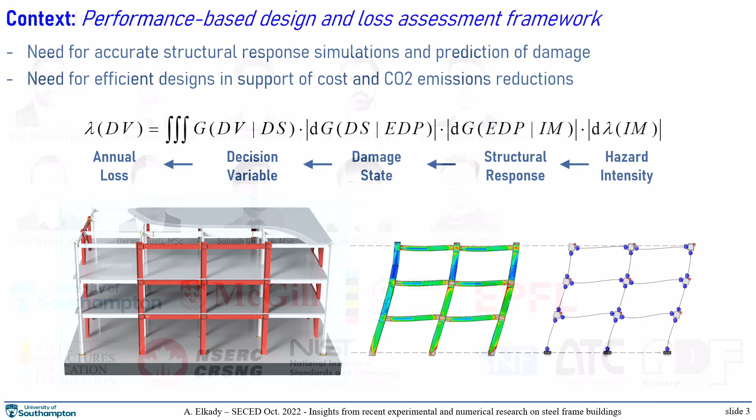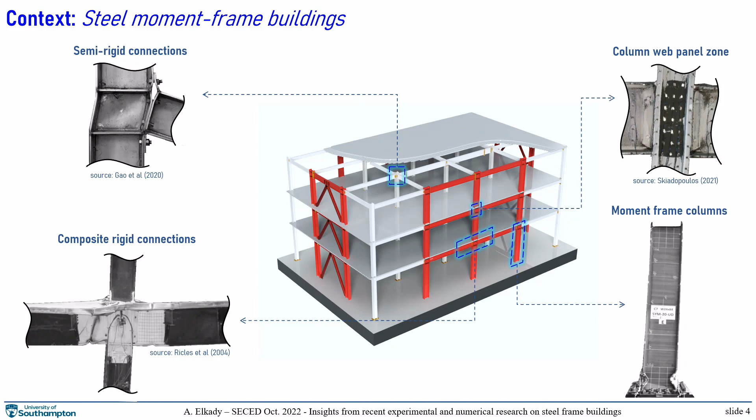Within this framework, we focused on buildings that have steel moment frames, which are common in construction. We are focusing on four structural components: the moment frame columns, the column web panel zone, the composite rigid connections, and finally the semi-rigid or gravity connections. I'm going to discuss what we have found or developed with respect to these four components.

I will start with perhaps the most important element, which is the steel frame columns. This is all discussed within the context of earthquake engineering.

If we look at steel moment frames, these are designed to dissipate earthquake energy through plastification of the beam ends. But you still get plastic hinge formation at the base of the first story column, where you have a fixed base. Under strong seismic events, you can get an additional plastic hinge at a higher story, and then you develop what we call a collapse mechanism, which of course we try to avoid in design.

Now the question here—the one you see on screen is an example from a shake table utilizing hollow square sections. But the question we had was: how would I-shaped or W-shaped columns, which we use in North America and Europe, behave under this type of seismic loading?

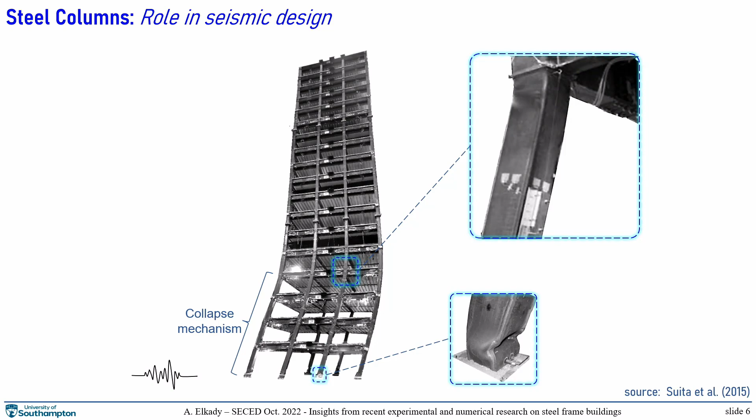About 7 years ago, what we had in the literature were tests conducted mainly on shallow or stocky columns—those less than 40 centimeters in depth. Looking at the plastic rotation capacity or ductility of these columns, several under moderate to high axial loads develop very limited plastic rotation, around 1%, which can be critical in a seismic event. We need more than that.

So the question was: how would deeper columns, those deeper than 60 centimeters, behave under the same type of loads? We conducted experimental research, testing about 24 specimens in 2 different labs in Canada, in Montreal. These are the setups you see here, with the specimens highlighted in blue.

On the one on the left, we tested cantilever columns, with a fixed base and a pin at the location of the inflection point. These are 2-meter long columns, tested at a 2/3 scale, so around 40 centimeters deep.

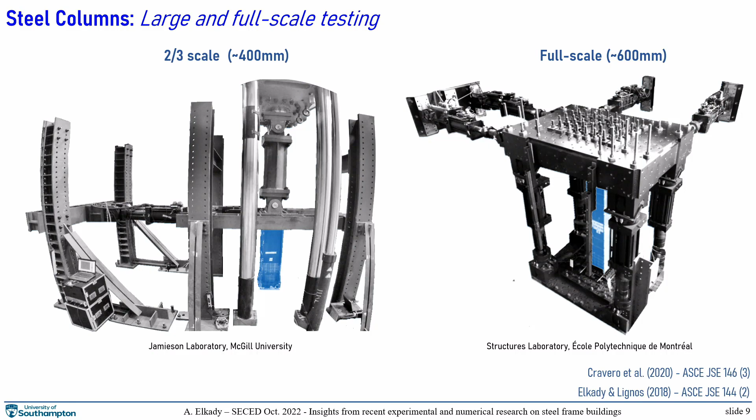The one on the right, we were able to test full-scale columns with realistic boundary conditions. This is a very fancy 6 degrees of freedom setup at École Polytechnique de Montréal. We're able to control the boundary conditions at the column top, and we apply drifts in all directions, as I'll show you in a second.

Here are some videos to break up the text I'm showing you today. These are the two test programs—let's look at the one on the left, the 2-meter columns.

You can see it's being subjected to lateral cyclic drifts, while we simultaneously apply varying axial load that goes into compression on one side and tension on the other, typical of what exterior columns would experience under a seismic event. As you notice, the main failure mode is local buckling taking place at the base, as expected.

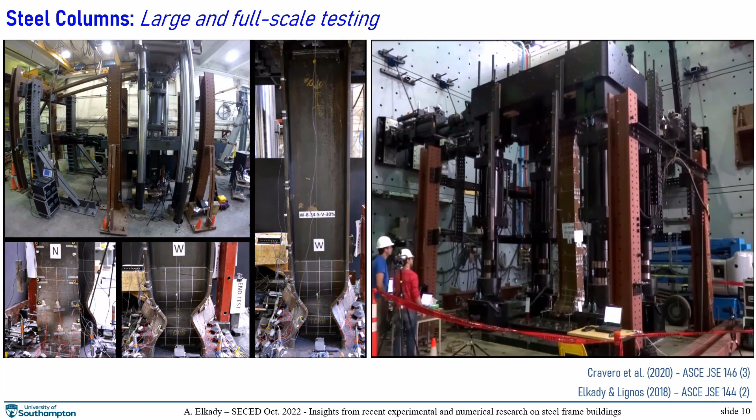Now the one on the right, with the full-scale test—it's a little dark, but you can see at the top we're able to simulate flexibility representative of the top joint, and we apply bidirectional drifts at the top, again representative of true earthquakes, with axial load applied on the column at the same time. You can see local buckling occurring at the base again, with some twisting and out-of-plane instabilities occurring at the later stage.

So when it comes to damage progression and failure mode, this is what we found out. Local buckling is the main damage mode, but this can become excessive after large rotations, and associated with that there will be some axial shortening. This axial shortening can be critical if you are considering that this column could be part of a high-rise building, for instance, so this can have effects on the overall behavior of the structure.

At the same time, if you are looking at larger rotations, like more than 2%, you can observe that once you get a plastic hinge at the base, the column in the weak axis starts to kick out a little bit, and you start getting some twisting modes. Now these two damage modes that you see, we don't design for those explicitly when we do seismic design, so this is something to consider.

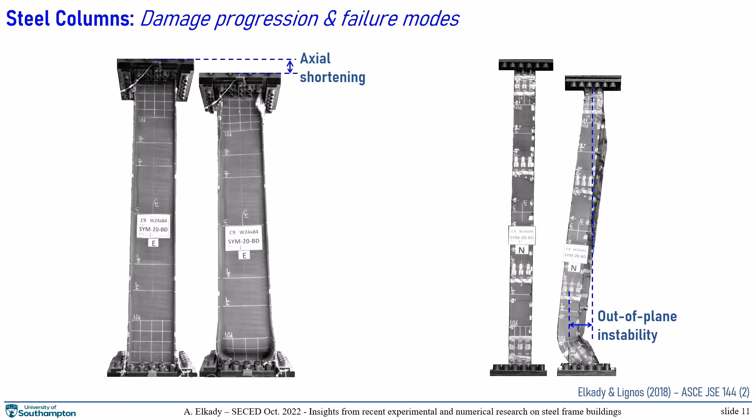Using this fancy setup, we were able to quantify the effect of boundary conditions. Before that, most of the tests were conducted on cantilever columns or columns with two fixed end boundaries. Now with these, what will happen is you get simultaneous plastic hinging at the two ends, and you don't observe much out of plane deformation in this case.

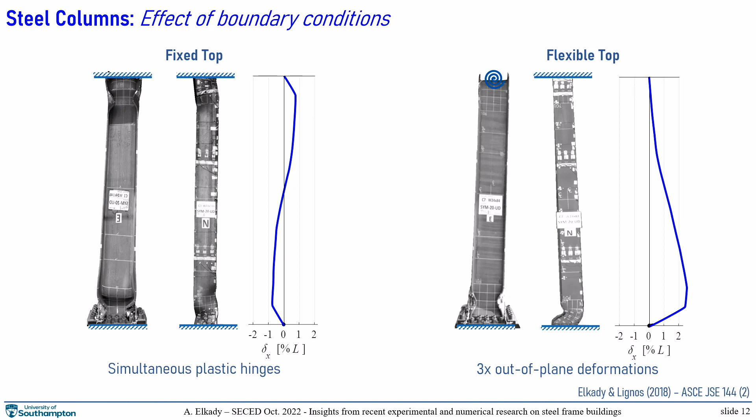Now if you look at the realistic case with a flexible top, what happens is that plastic hinging occurs only at the base, and at the same time the amount of out of plane deformation is about 3 times more, and this is again associated with some twisting.

When it comes to the effect of the loading protocol, this is something that has been known before, so we already know that any structural component's response will depend on the loading protocol or load history it's being subjected to. So here we were able to quantify that.

On the left, you see the column being tested with your typical symmetric cyclic protocol. This can be conservative compared to a strong seismic event, because under a strong seismic event, the structure will tend to behave asymmetrically - it will tend to move in one direction more, what we call ratcheting. So this is the one on the right.

What you can observe from here is that at the same target rotation, the symmetric protocol column can develop half the plastic deformation capacity and can shorten 5 times more. So it can be conservative for sure.

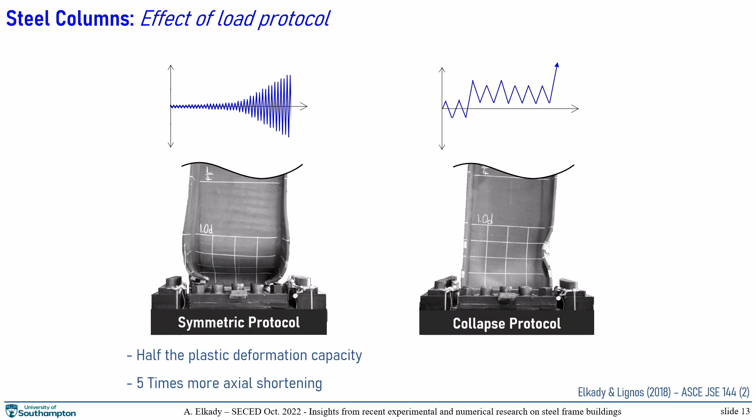As I mentioned, one of the important things we investigated that has not been done before is the effect of bidirectional loading. On the left, we have the unidirectional case, just pushing the column in the strong axis - these are the two protocols. We developed additional protocols that are consistent with those, but they have a weak axis component.

Under bidirectional loading, the difference is not substantial, but if you are looking at rotations more than 2%, you will start seeing additional P-delta effect in the weak direction. So this additional demand causes additional out of plane instabilities and twisting of the column.

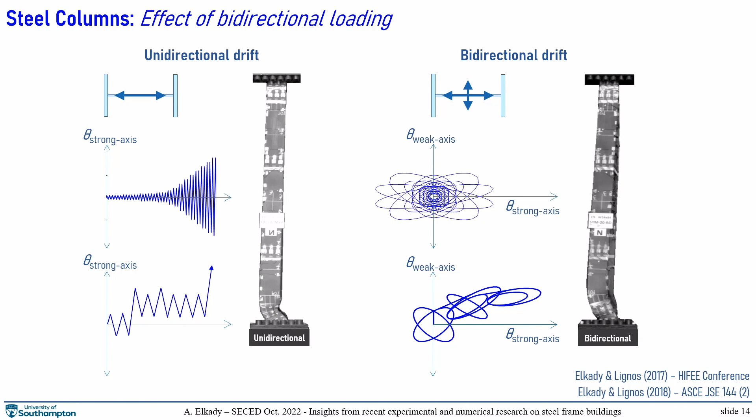Now this gives us a very good overview, an idea of how columns behave, but not the total picture. So we want to complement this with some simulations - we go directly to finite element analysis. So this is the numerical research part, and we had to build a finite element modeling approach from the ground up to make sure it's objectively robust.

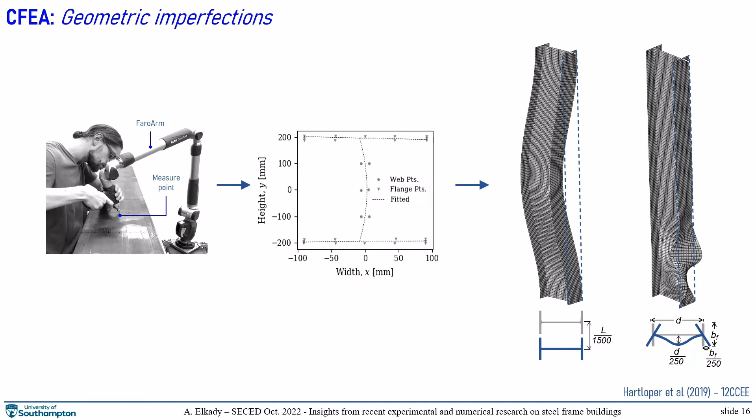We start by conducting measurement of the geometric imperfections in hot rolled sections, and then we recommended some limits that you can use in your finite element model. The same thing we have done with the residual stresses - we did the measurement, and then recommended some distributions that you can use again in your finite element model.

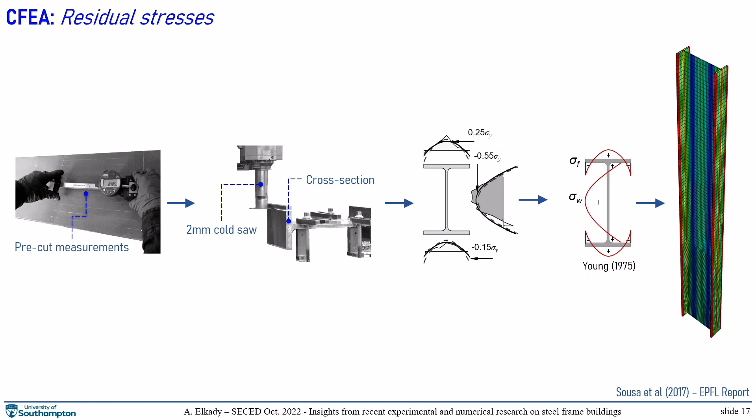Perhaps most importantly is the cyclic material model parameters. In order to obtain these parameters, we have done thorough calibrations with steel coupons subjected to different strain histories. Then by doing optimization for the material parameters, we were able to develop these parameters that you see in this table for different steel grades used in Europe, Japan, and the States. So you can directly look up your steel grade from this table, find the parameters, and use them directly in your finite element software.

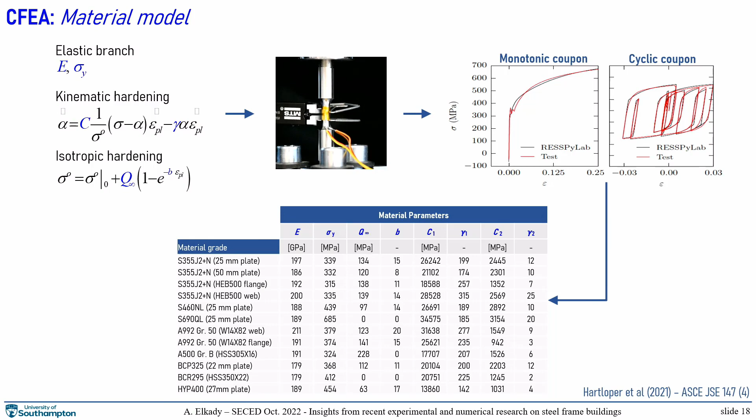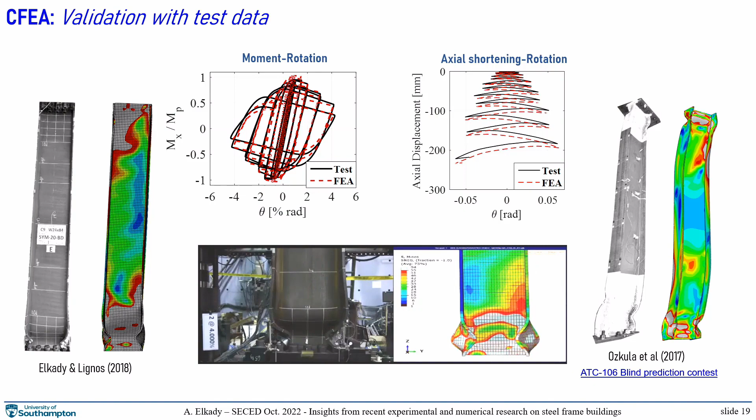And it goes without saying, we have done thorough validation of the model, pretty much with all the available test data from our tests and from others. And we contributed as well to a blind prediction contest, which we won. So this is all done to make sure that our model is objectively robust and that we can extrapolate it to other cases.

Now we have a data pool of almost 150 tests and more than 1,000 simulations. So we can use this to start developing better seismic design recommendations. And we can use them to do some regression and maybe provide some formulas for some important performance indicators.

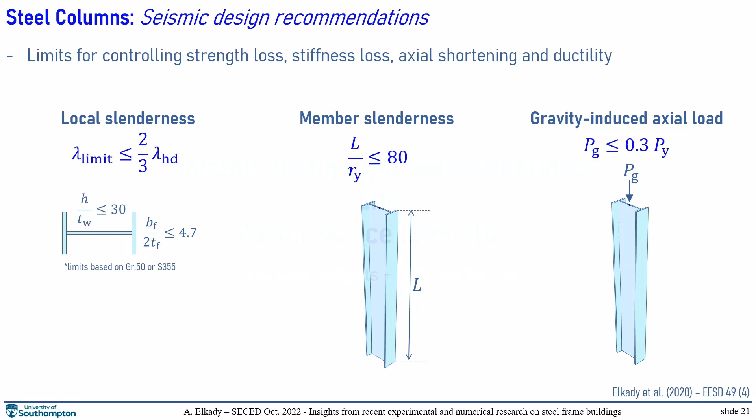So these are all limits, one related to the local slenderness, so making it more stringent. And then we have another one for the global member slenderness. And finally, a limit for the axial load ratio induced by the gravity load. So when you do those, then you will achieve a minimum performance of the column that is deemed acceptable.

I told you about performance indicators. So again, we have lots of data. Easily you can do regression analysis, and this is what we did here. So axial shortening, so now you can predict it with this simple regression formula. You just need to put the axial load, the column slenderness, and if you know the cumulative plastic deformation based on whatever history the column is subjected to...

...then you can compute the amount of axial shortening directly, which can be very useful if you are assessing damage in the aftermath of an earthquake and you want to see if this column will be repairable or not, for instance.

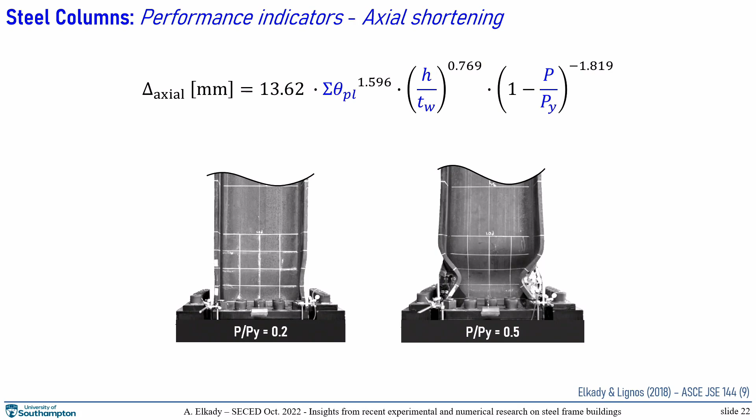Same thing we have done for the plastic hinge length. So this is another formula that you can use to compute the extent of the plastic zone. And this again can be very helpful if you are doing some kind of what we call distributed plasticity modeling or fiber-based modeling.

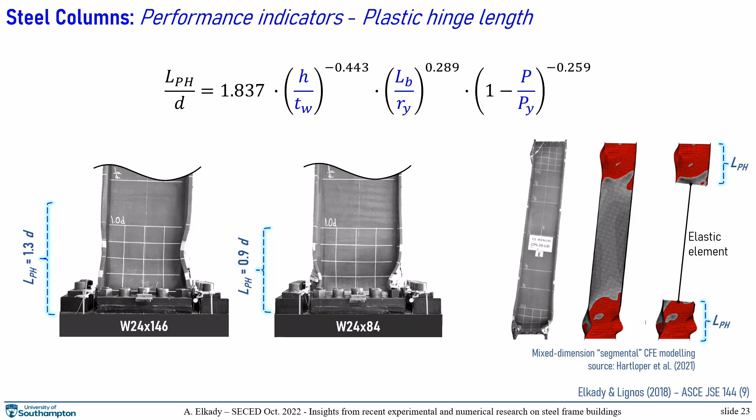So here, if you are using finite element, instead of modeling the entire column with solid or shell elements, no, you do that just in the plastic region where you are going to get the nonlinearity, and the rest of the member is represented with an elastic element. So it saves lots of computation time.

Now, this part for the loss assessment framework, we found that there was no fragility functions that can predict the probability of damage in columns. So we developed those as well. So we started developing, defining some damage states relating to the yielding of the column, local buckling, different levels of damage.

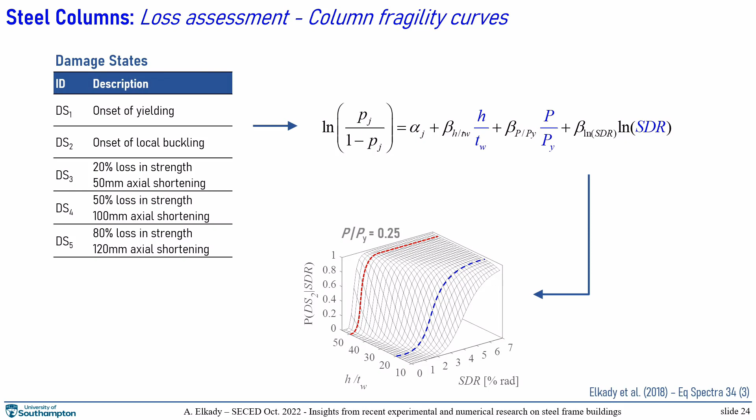And then again, in this equation, it's very simple. You just enter the story drift ratio, the axial load, the column slenderness, and then it will give you the probability of being in a given damage state.

Again, within the loss assessment, we found that currently, the current methodology to decide if you need to demolish a building in the aftermath of an earthquake, this was based on the amount of what we call the lateral residual drift. So if you look at a building, you do an analysis, or after an actual earthquake, you look at how much lateral residual drift is there...

...and then using some fragility function, you can get the probability of demolition. So we updated this with a bivariate one that considers both the lateral drift and the amount of axial shortening. And actually, the amount of axial shortening can be critical, and it can control this decision or this probability if you are looking at high-rise buildings subjected to long-duration earthquakes, for instance.

Now, I talked about models for engineering practice in order to do robust or accurate simulations. So in the literature, one of the important documents is ASCE 41. So these documents provide you with how to model different structure components.

So for columns, you represent the column with a single nonlinear spring, and this spring, you assign to it a backbone curve that represents the backbone of the moment rotation behavior under cyclic loading. The problem with this curve is that it doesn't consider the dimensions of the column, the axial load, and different things that affect the behavior substantially. So we wanted to update those.

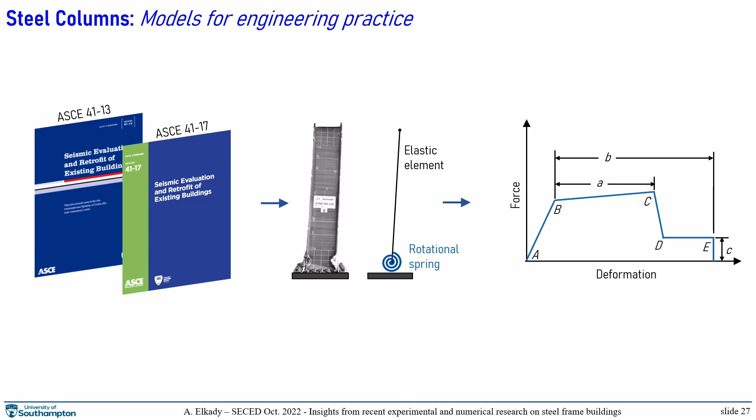While we are aware that different loading protocols will make the column behave differently, we developed two types of backbone curves: one representing the backbone under monotonic loading, shown in black, and another as the first cycle envelope under symmetric cyclic loading.

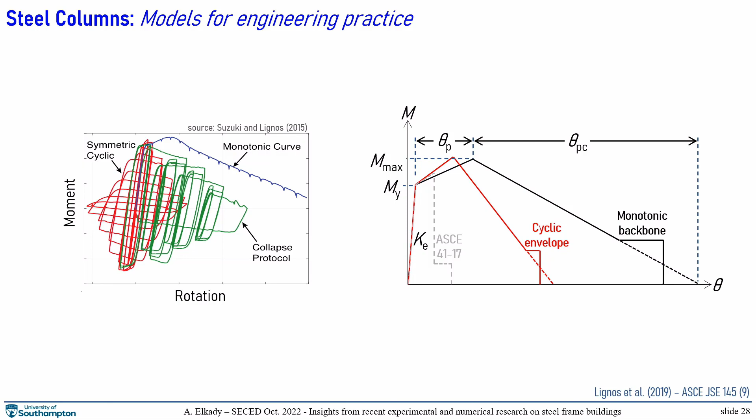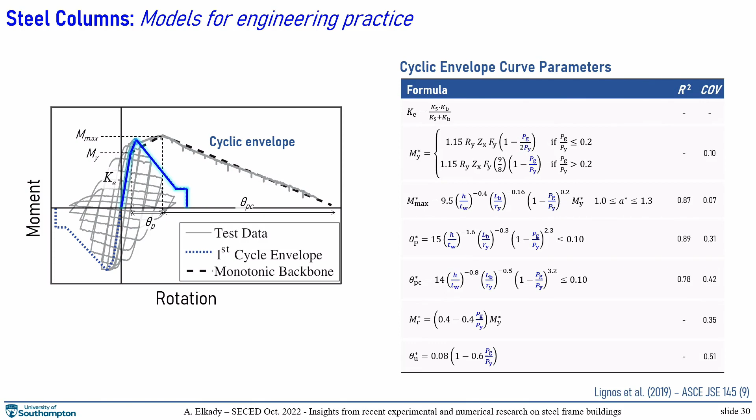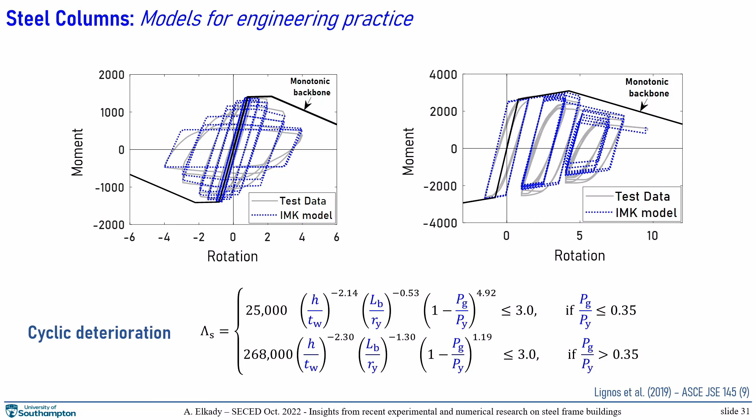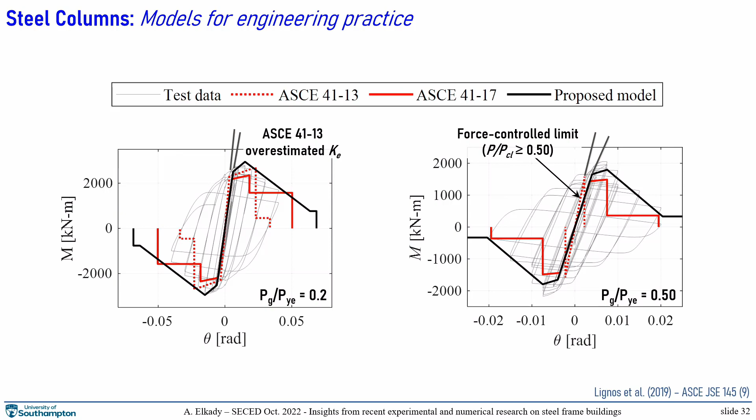This is a comparison showing how superior the new model is compared to the past version and the current version of ASCE 41. The new model is in black, and you can see it does a much better job capturing the elastic stiffness, the strength level, the post-yield stiffness, and the degradation slope. This model is already published, as shown in the reference here, and it's going to be included in the next iteration of ASCE 41, expected next year in 2023.

The problem is that if you let it go to high levels of inelasticity, like large shear distortion, you will increase the strain at the column flange, and eventually fracture can occur in the weld of the beam flange. There have been several detailing guidelines to reduce this probability of fracture or even eliminate it totally, which indirectly promotes the use of panel zones in seismic design.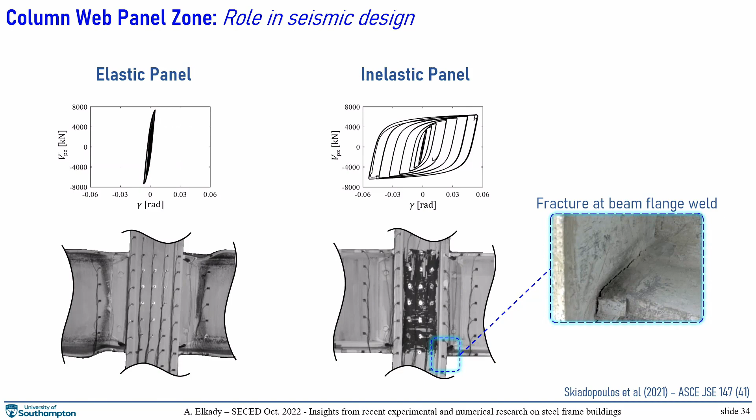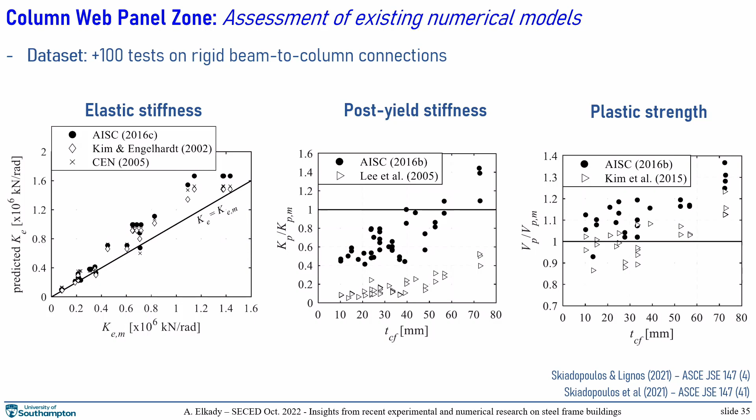How did we update it? Same procedure: we used the same finite element modeling approach discussed earlier, did a parametric study to complement the experimental data, and looked at different aspect ratios of panel zones, different sizes like thin and thick, and analyzed the stress and shear stress distributions and evolution in the panel zone.

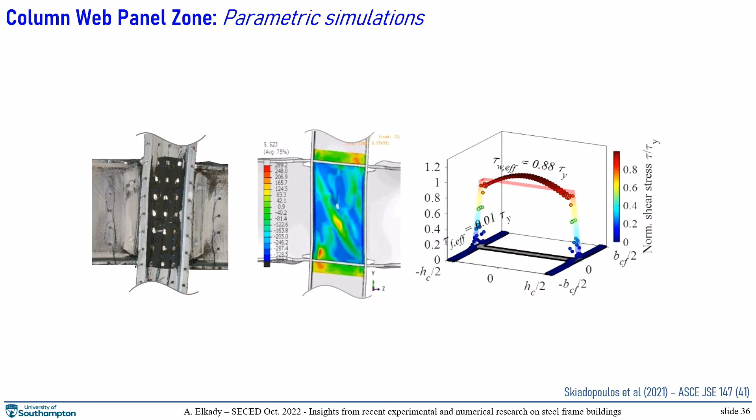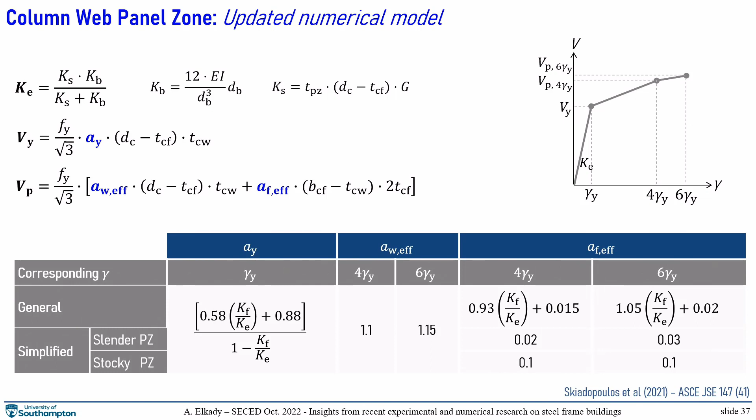From this, we developed this trilinear curve. Again, this is a hybrid model, mainly developed using analytical expressions with some factors obtained empirically just to keep it simple to use. You can construct the backbone curve, put it into your model, simulate—done.

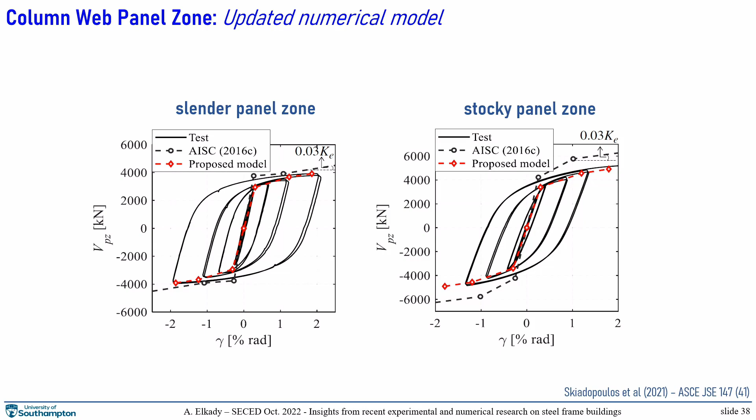So how good is it compared to the existing model? Here you can see some comparisons, with the new model in red. Again, even with the elastic stiffness, it does a better job capturing that, and the evolution of shear strength is much better, even at large levels of shear distortion.

Moving to the third topic, so we're almost close to the end. This part is actually from my PhD, where we looked at composite beams in rigid connections.

Now, how can we model these kind of elements? Well, there is one way you can do finite element modeling, but as you probably know, this is something that's not easy to do. It requires lots of computation time and lots of experience to do it correctly.

The other way is the component method: you represent each component within the joint, like the steel beam, the shear studs, the reinforcement, the slab, using simple springs, then connect those mechanically and you get your response. But this can be laborious if you try to develop it for each connection in your building. The simple, most popular one is where you just have one single spring to capture the entire behavior of the composite connection.

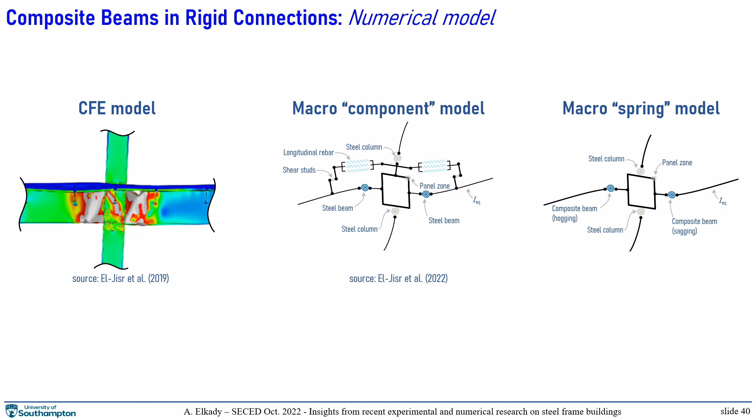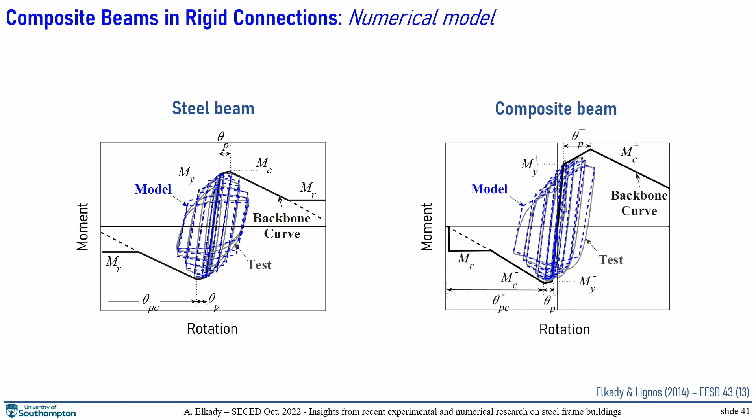Now, we already know how steel beams behave, and we have equations similar to the one I presented earlier that construct the backbone curve and simulate the cyclic behavior of steel beams. But once you have a composite slab, the behavior becomes asymmetric under hogging and sagging bending. So the question was, how much do we need to modify the backbone curve for the steel beam to obtain the composite backbone?

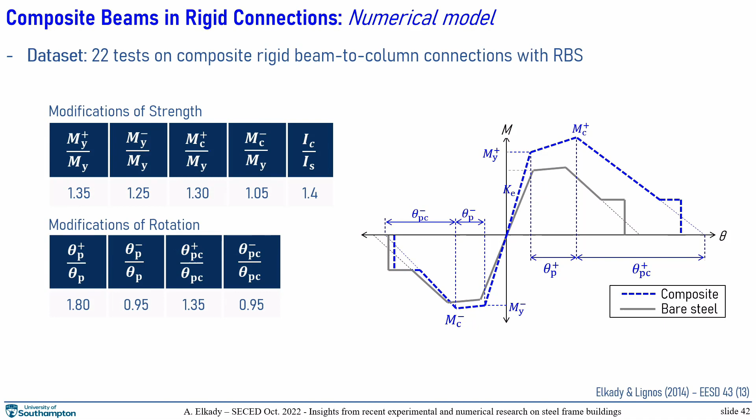We had 22 tests on composite beam-to-column connections with reduced beam sections. We did some calibrations and statistical analysis, and from this we provide simple modifications to strength and rotation that you can apply to get the asymmetric behavior.

Something else important recently investigated using finite element simulation is how differently this connection would behave when modeled as a sub-assembly, which is the typical test we do in labs. We just use a cruciform connection and test it like that. So how different will this be from the connection in an actual frame where there is continuity?

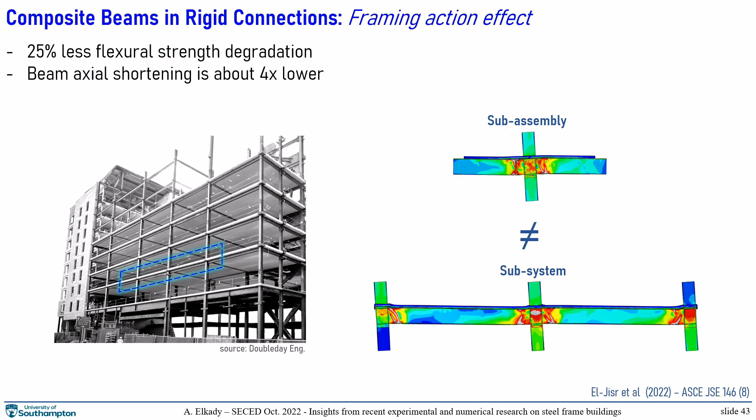What we found is that the connection can actually behave better: it experiences 25% less flexural strength degradation, and the beam axial shortening due to local buckling becomes 4 times lower than the one observed in sub-assemblies. The reason is the framing action and restraint from the columns next to the connection, plus the continuity of the slab and reinforcement.

So this is my last component, part of the research I'm currently conducting at University of Southampton. Semi-rigid connections are a main part of any structure. They are abundant in construction, found pretty much everywhere in conventional framing and in ductile framing in seismic regions. They come in different shapes and forms.

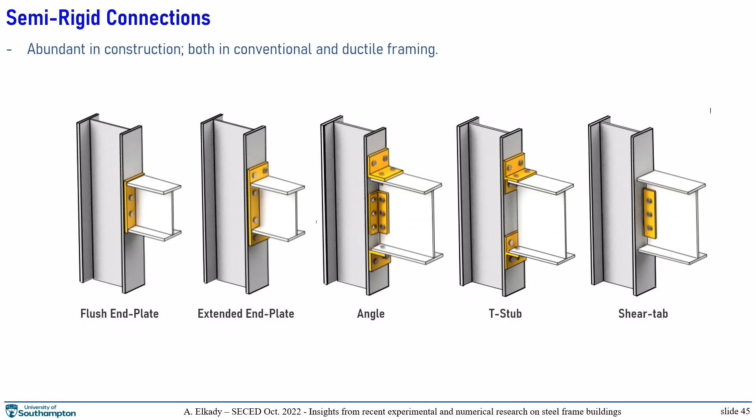The question is that when we design or model these connections, we typically ignore their contributions and just assume them as pinned or fixed as a simple way of doing things. You can see that end plate connections, like extended or flush end plates as shown in the illustration, can actually develop large stiffness and flexural strength, so it's a shame that we ignore this contribution.

Now, the literature as well as our recent research suggests that current numerical models for these connections fail to predict their response reliably. The good news is there's a huge number of tests conducted worldwide since the 1950s, which can help us develop newer models.

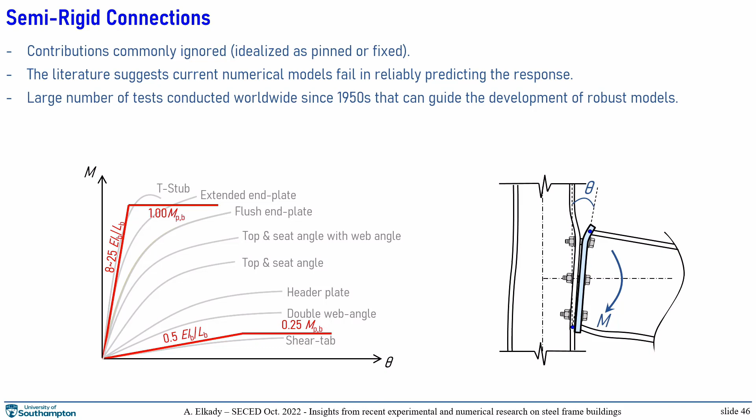So this is the task we've taken on, developing a comprehensive experimental database for the first time. Right now we have more than 1,600 specimens from more than 200 testing programs, dating back to the 1960s, and it's not easy to find some of these research programs. This is a multi-attribute database collecting information about the testing program, connection topology, geometry, materials, damage modes, and so on, all tabulated systematically.

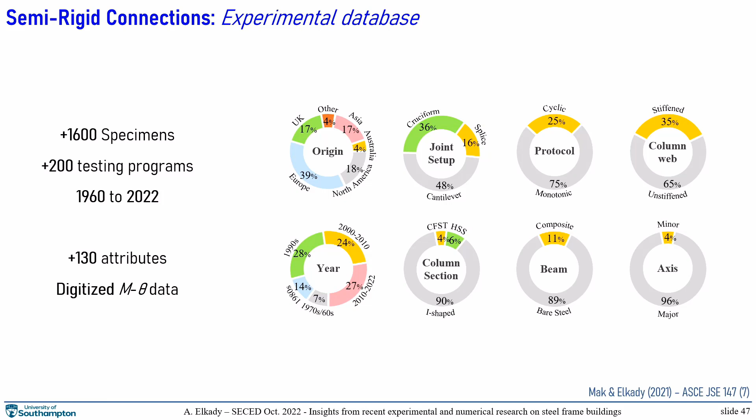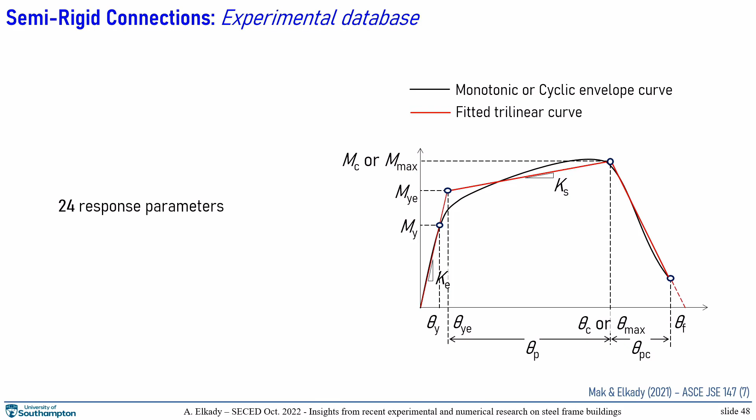And of course, we have the moment-rotation behavior for each specimen. From the moment-rotation curve, we can do some fitting to deduce parameters like stiffness, strength, ductility, rotations, and so on. Using this data, we can assess existing models or even develop newer ones. So this is just to give you an example here.

So this is for flush end plate connections, perhaps the most common one used among the different types of semi-rigid connections. Here you can see distribution of the strength and ductility of these connections. In the presence of composite slab, these simple bolted connections can transfer more than 84% of the beam plastic moment, which is borderline full strength connection.

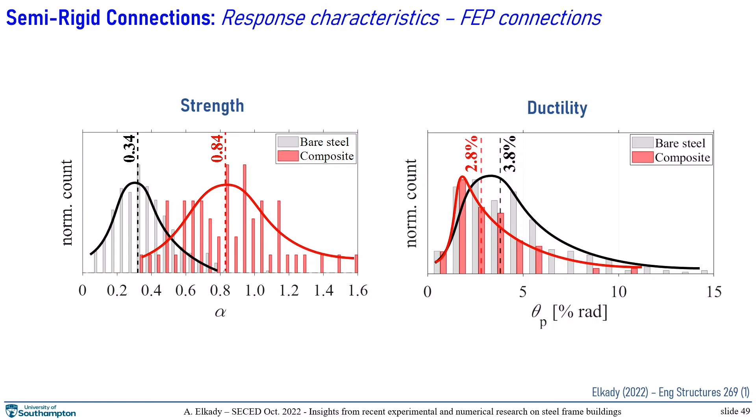Most importantly, with respect to ductility, these connections, if detailed properly, can achieve very good ductility, and can have more than 4% plastic rotation, which is a rough number that we use in seismic design.

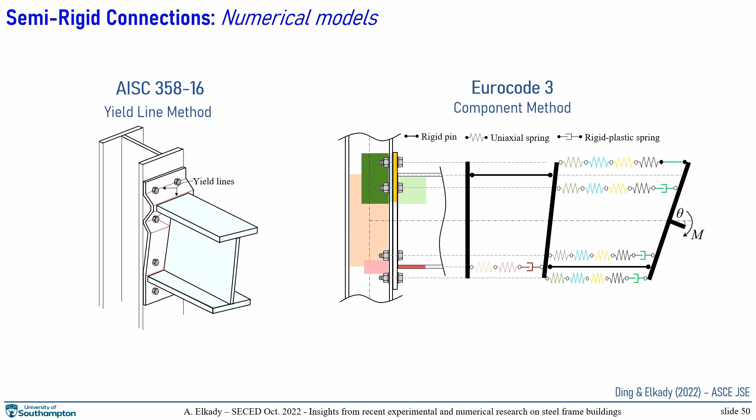We can assess existing numerical models, and there are a huge number of numerical models available, each one trying to do a better job than the previous. But perhaps the most important two are the ones used in design: in the US, AISC, and in Eurocode, namely the yield line method and the component method. This is a sample evaluation using flush end plate connections as example.

And these errors become much larger if you are looking at the stiffness, which is very sensitive to the connection parameters.

That concludes this part. Now the summary to wrap up. Where we started, I end with where we started. We looked at 4 different structural components in steel moment frame buildings, including frame columns. What we developed are all things you can use right away.

We have a validated finite element modeling approach with calibrated material models for different grades. We have new design provisions to improve the ductility and stability of columns. We have formulas to predict axial shortening, plastic hinge lengths, and formulas to predict the probability of damage and fragility of columns. Most importantly, we have numerical models that you can use in simulations.

Same thing for the panel zone. We have an open source experimental database that you can access and analyze further, and we have this updated trilinear shear force deformation model that's usable for high levels of inelasticity.

We have an asymmetric model for composite beams, and we highlighted the difference in behavior between the connection in a true building and the idealized connection in tests. And finally, for semi-rigid connections, the very large database we currently have, and how we are now utilizing it to quantify response characteristics of the connection and develop new prediction models.

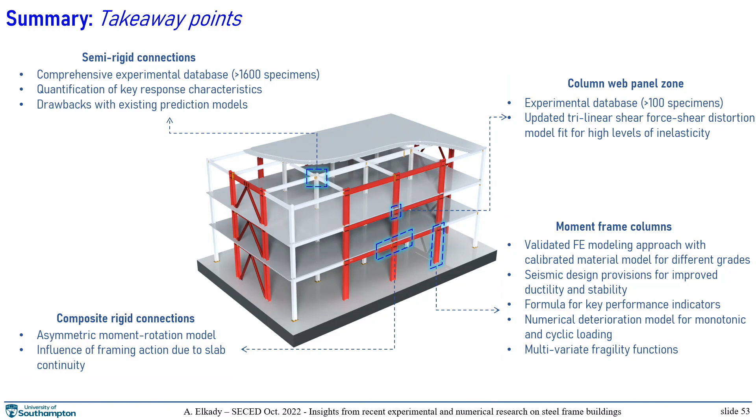Okay, thank you. And the other one is, in your final slide, or one of your final slides, you show that the yield line model sort of outperforms a bit the component-based model in the estimation of variation, right?

What do you think is driving that?

For the yield line method, it considers the end plate and the column flange for the yielding mechanism. It doesn't consider the panel zone behavior, the beam buckling, or the bolt elongation, compared to the component method, which is of course much more generally applicable.

But thank you, that's a good question. Can I follow up on the first question?